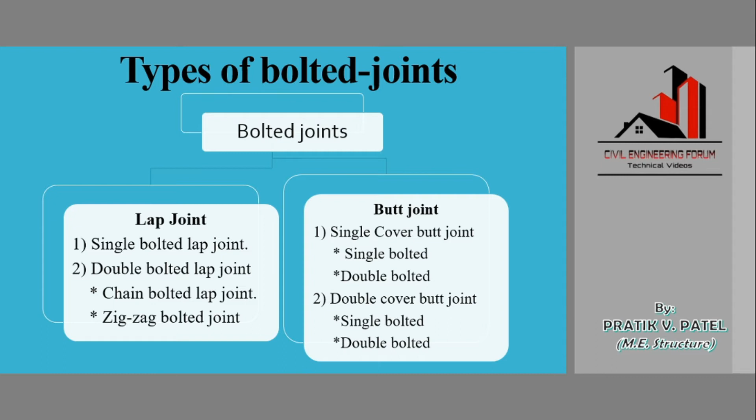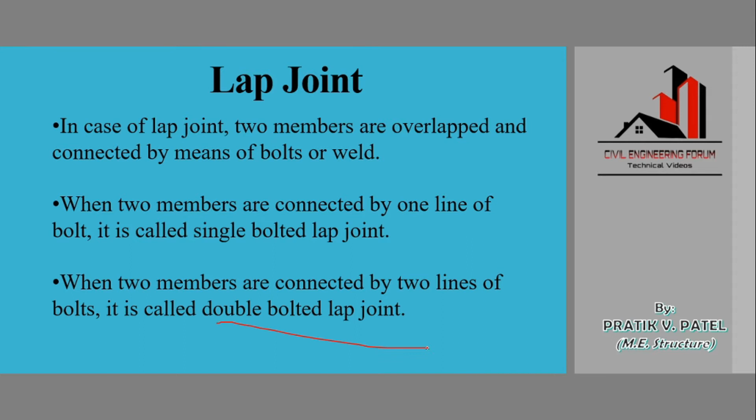Let me change the marker. Okay, this line is this one. It is only the single line. If we have two lines, another line over here, then it becomes double bolted lap joint, as shown over here. Then third point is, when two members are connected by two lines of the bolts, it is called double bolted lap joint as shown over here. So this is basically the meaning of lap joint.

Here with figure I have shown single bolted lap joint and double bolted lap joint. This is basically the plan or the top view of a particular joint. This is a single line, so it is single bolted, and there are two lines, so this is double bolted. We know that the distance between all these bolt holes is known as pitch, and this distance is known as gauge distance. This is edge distance. Again we have this end distance, but right now we are not concerned with this. What we need to know is just the type of joint.

Now for this single bolted lap joint we'll understand first. Here this is the line of action of the forces, and this is in tension. Both of the ends are pulled and it is in tension. If we try to extend this line of action, it will go something like this, and this line will go something like this. So see, both the forces are not in the same line. This distance is having some eccentricity. This is known as eccentricity E.

So basically we can say that these equal and opposite forces form a couple. A couple in the sense two equal and opposite forces with some distance between them. And due to this couple, there will be some effect on this bolt, or some undesirable stresses may be induced. We can say that a lap joint may have some undesirable stresses on this bolt. We'll have this explanation in the next PPT.

Now we'll move toward the specification. The load in the lap joint has eccentricity E, as we discussed. Therefore a couple is formed. As I explained, a couple is formed which causes undesirable bending in the connection, bolted or welded, but right now we are talking about bolts. So there is some undesirable bending, undesirable stresses in the connection, and the bolts may fail in tension.

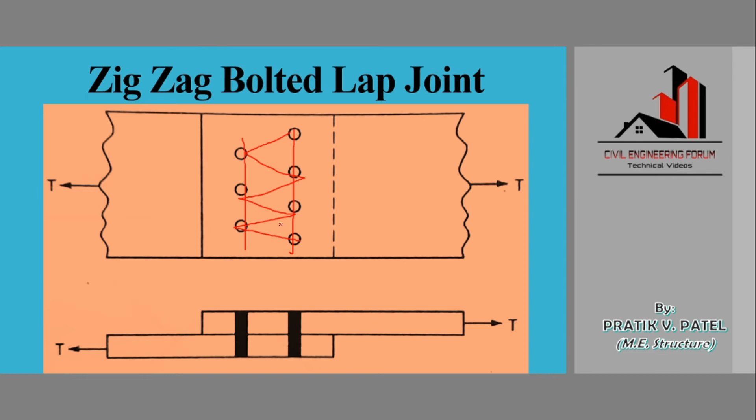So for particular types of bolt or weld or whatever connection that may fail in tension, there are chances of failure. To minimize this effect of bending in lap joints, at least two bolts in a line should be provided. See, we are talking about this line. There should be at least two lines here, like this joint in lap joint. So remember, if we are using a lap joint, do use two lines, or a double bolted lap joint.

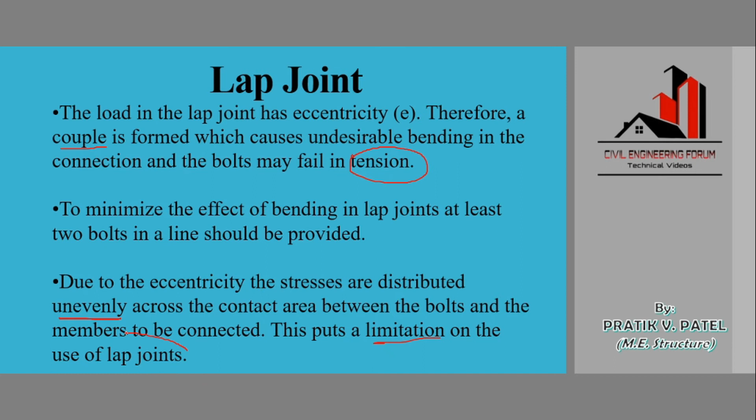Due to the eccentricity, the stresses are distributed unevenly. See, here stresses are distributed unevenly due to eccentricity in lap joint across the contact area between the bolts and the members to be connected. This puts a limitation on the use of lap joints. That is, it forms the eccentricity and undesirable stresses are there in the connection.

The second is butt joint. In this type of joint, the two main plates butt against each other and additional cover plates are provided on either one side or both the sides. So we'll see the figure. In the butt joint, we are attaching these two plates. This is one, this is the second one. Both plates are to be connected, but they are connected by this cover plate. An additional plate is attached on the top, and on both the sides bolt holes are there for the insertion of the bolt.

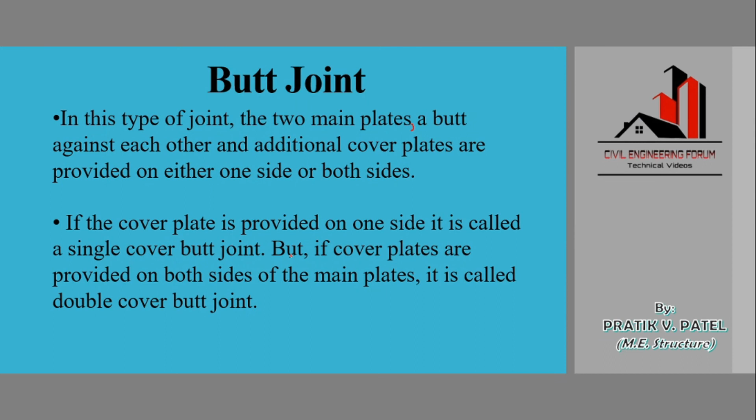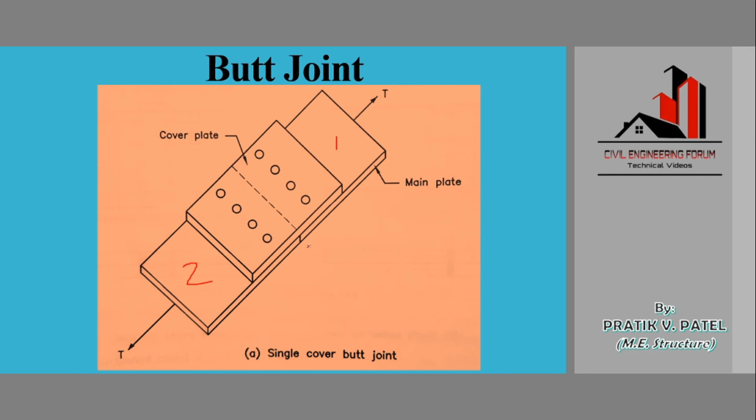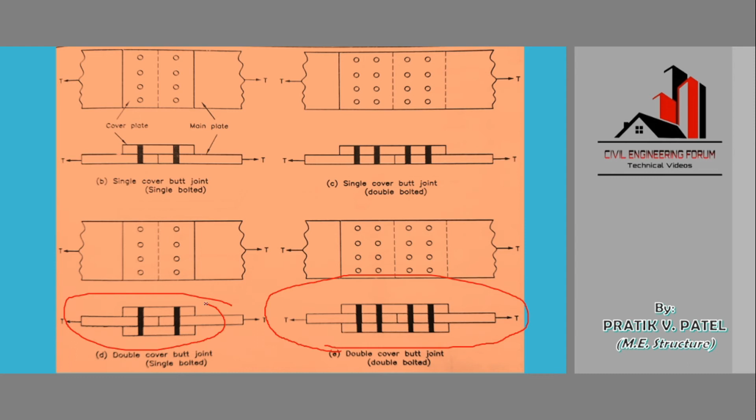But the difference is, this is single cover butt joint, single bolted. Here there is only one line on both the main plates. But if we have two lines of bolts on both the plates, then it will be single cover butt joint but double bolted. And similarly we can have double cover butt joint with single or double bolted, as seen in this figure.

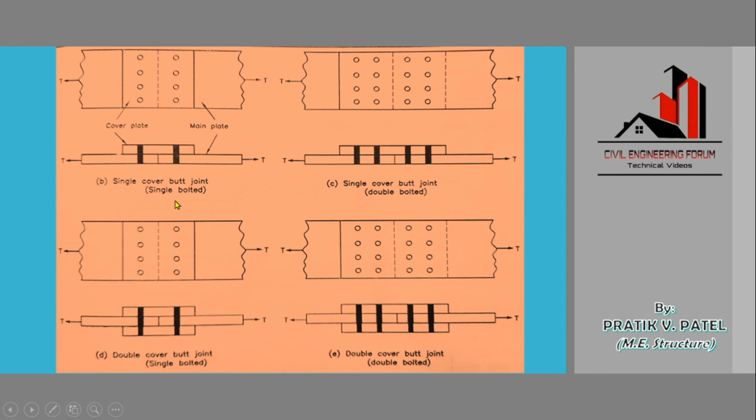Moving further, butt joint is preferred over lap joint due to the following reasons. Here I have shown why we use butt joint over lap joint. I have two reasons. The first is, in case of double cover butt joint, eccentricity of forces does not exist and hence bending is eliminated. In this figure it is shown. This is a double cover, where this is the first cover and this is the second cover. Here we can technically say that the line of forces is in the same line, equal and opposite. So it is better than lap joint, as it does not give extra stresses to the connection or bolts.

But in case of lap joint, eccentricity of forces causes bending in the connection. We know that lap joint has this limitation. So the better one is double cover butt joint. This is the best one to connect two plates. Then the second point is the preference of butt joint.

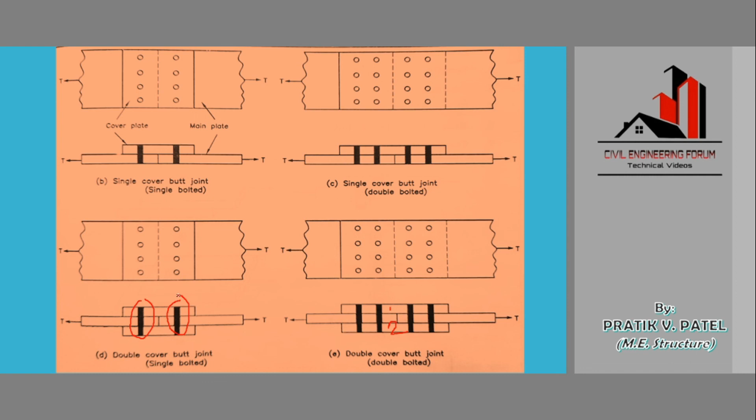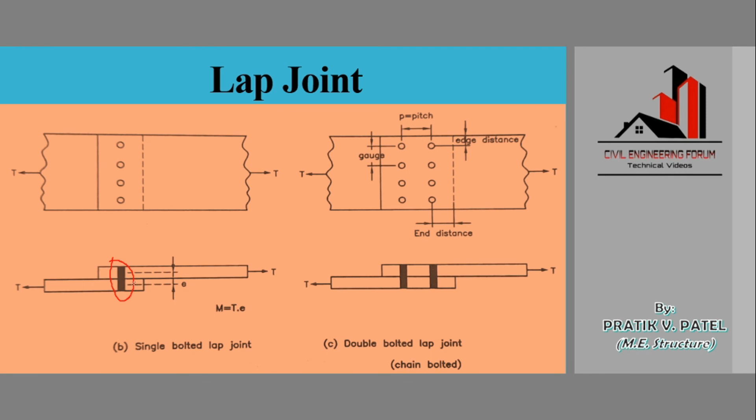In the case of double cover butt joint, the total shear force to be transmitted by the members is split into two parts. The shear force we are transferring is divided between both the plates, the first plate and the second plate. While in lap joint it is not divided. Full shear force will be on this bolt, and there are maximum chances of failure in lap joint compared to butt joint. So friends, this is all about lap joint and butt joint, in short, types of bolted connection.